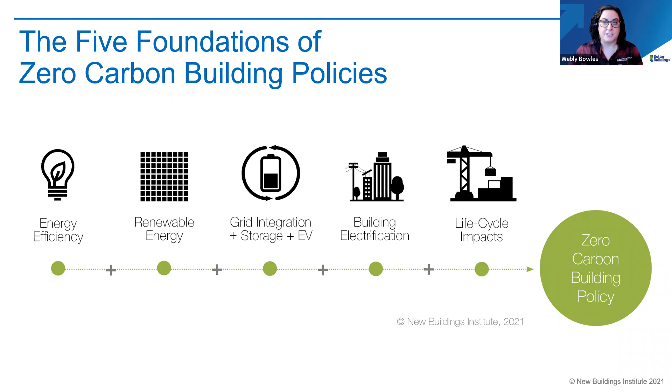The term carbon neutral has picked up steam over the last year or so, and it has a couple different meanings. For years, we've seen utility programs that have only been focused on energy efficiency, and that has led the market to lower energy buildings, which is great. But now the building sector is shifting from decades of regulation and programmatic orientation around energy efficiency, from kWh and therms, to governmental actions that are centered on carbon and GHG emission reductions. So we need to figure out how we align these two, but how do we do it?

Just as zero energy has had many different definitions, so does carbon neutral. NBI reviewed over 15 different definitions to evaluate the similarities and differences and how they were represented, including embodied carbon, on-site combustion, and how renewables were defined and how they were actually counted. And while the details varied, we noticed that there were actually a lot of commonalities. The divergence was really in the details. This chart is from WSP. NBI amended it a little bit, and it represents a few of the carbon neutral definitions and programs that are out there, and it shows the commonalities and variances. Next slide.

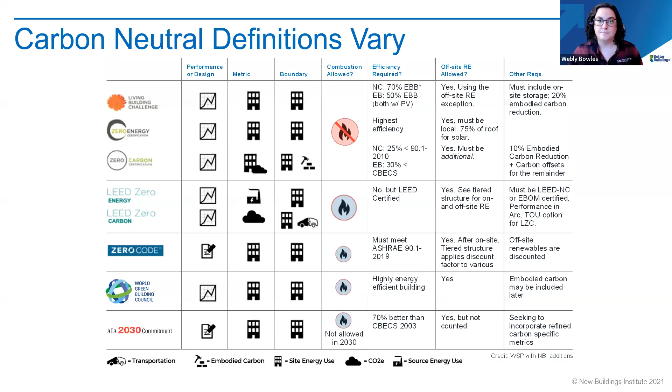And then we throw in corporate terms, and there's a whole different structure about addressing carbon emissions. This is the World Resources Institute's GHG Protocol, Greenhouse Gas Emissions Protocol. I'm going to present this at a high level. There's a lot more that goes into this; we could do a whole 1-hour discussion around it. But essentially, Scope 1 emissions are the emissions from your owned, leased, and otherwise controlled gas equipment: gas appliances, fleet vehicles, fossil fuel leaf blowers, and other such things. There are a few other emissions counted in here, including fugitive emissions from on-site gas and refrigerants, but essentially it's related to gas.

Scope 2 emissions are from the electricity indicated on your electric bill. Electricity emissions vary depending on the energy source. In the Midwest, you might have more coal and gas, so your electricity is going to have a higher amount of carbon in it compared to those that live in the Northwest using the same exact amount of kWh, where our electricity is produced with more hydropower.

And then Scope 3 emissions are called indirect emissions, and those are the emissions from day-to-day activities like travel, purchased materials, waste, and other outsourced activities. Scope 3 is often calculated based on a dollar amount spent, but I do want to note that as embodied carbon is becoming a larger topic in buildings, this is where Scope 3 emissions land. So if you're familiar with the term embodied carbon in buildings, this is where that is. Again, this is at a very high level. The Better Climate Challenge is focused on Scope 1 and Scope 2, so we can set aside Scope 3 for now. Next slide.

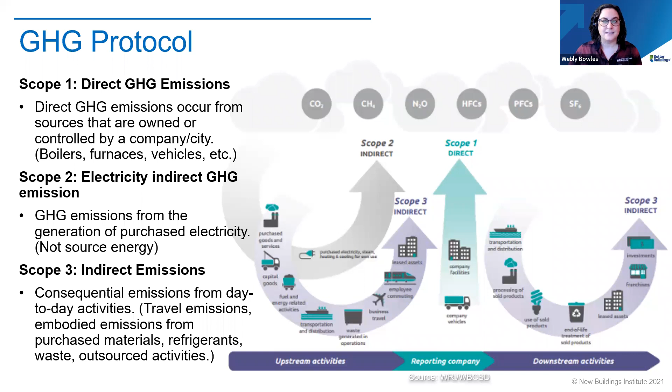Zero energy building policies are not the same as carbon neutral policies. We've seen zero energy policies spread across the US, which is great. But going back to the 5 foundations, we're looking at 4 that are really around carbon neutral policies. Within renewables at the building level, California Title 24 requires solar ready, and Santa Monica in California requires 1.5 watts of solar power installed per square foot of building. For multifamily and small commercial, that is 2 watts per square foot. So there are requirements around renewables in some places in the US.

Around grid integration, Washington State actually requires that any water heaters sold in the state have a demand response communication module installed on that water heater. It doesn't require them to be controlled by a utility, but just to have the option for future demand response.

With building electrification, we're seeing a lot more gas bans across the country. Berkeley was the first in the nation to do that: no new fossil fuel in new construction. And Brookline, Massachusetts has a similar one, which is no fossil fuel in residential.

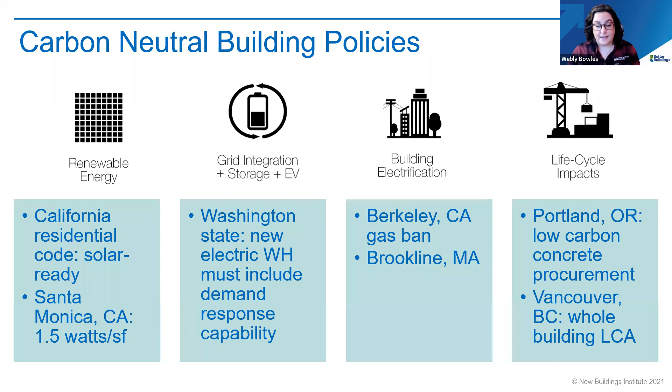And then within embodied carbon, this is where we are seeing a lot of spread as well. So in Portland, Oregon, we have a low carbon concrete procurement policy, as well as a deconstruction policy. Vancouver, BC has a whole building LCA for those that are rezoning. And then there's a lot more happening around refrigerants. So collectively, these policies are requiring low embodied carbon and low operational emissions. Next slide.

So when trying to describe carbon neutral buildings, we split the actions into two groups. We look at the core components and then the additional components. The core components of carbon neutral buildings are very similar to zero energy buildings, if you're familiar with that. So we have energy efficiency, renewables for on and off site, off-site renewables being a little bit of a newer concept, and then measuring and managing net zero operations, which is essential.

And then in addition to the core components, we have additional components. These are the components that will lead us towards a carbon neutral future. So electrification means no gas on-site combustion. Building grid integration strategies, allowing the grid to adjust set points of the building's mechanical systems and using the grid during off-peak hours when the grid energy carbon is actually lower.

Low global warming potential refrigerants. These are your natural refrigerants and lower global warming potential blends. And then also looking at leak protection. That's a really important thing when it comes to refrigerants because they are very potent and can destroy the environment. And then the last one here is embodied carbon. So selecting lower carbon materials that reduce carbon emissions before the building is even operated. Metals and concretes have the largest potential for those.

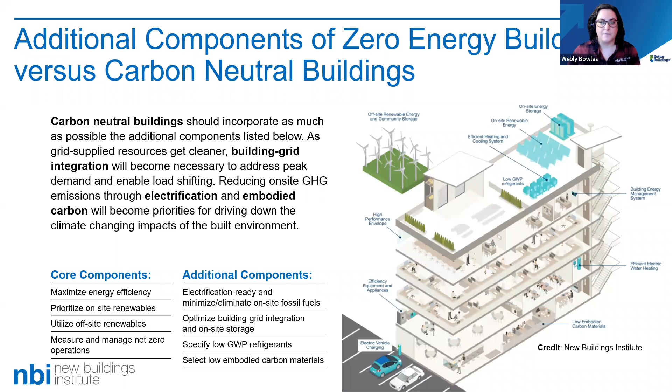So beyond decarbonizing buildings for the good of using less energy and cutting emissions, high performance carbon neutral buildings have additional benefits. We can future-proof against rising energy rates, which can help reduce our bills. High performance buildings provide an opportunity for designers to market their understanding of these components and help them limit their learning curve when new codes and policies come out. There's also health benefits.

Fossil fuel free buildings have cleaner air due to no gas, so we're not looking at some toxic indoor pollutants. Often high performance buildings have tighter envelopes with better insulation, so we can better control the ventilation within the building. And we can make sure that there's no cracks in the envelope, so we're not pulling in air through the envelope, which can often lead to water infiltration, mold, and other contaminants. Again, getting back to that healthy buildings idea.

That thick sealed thermal envelope is also great for resiliency. It limits the indoor temperature swing if the electricity goes out. There's a great report called Baby It's Cold Inside, and it looks at the conditions inside, based on different thermal envelopes, when the power goes out.

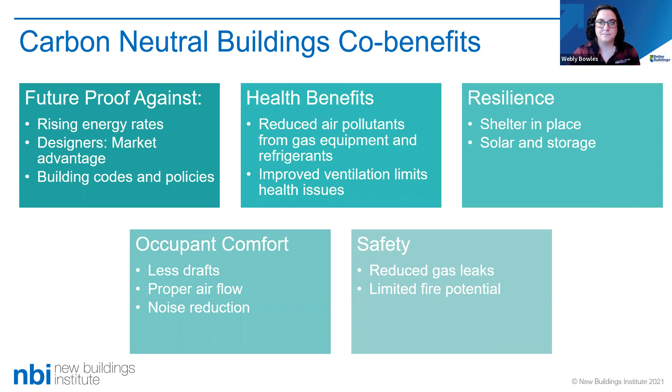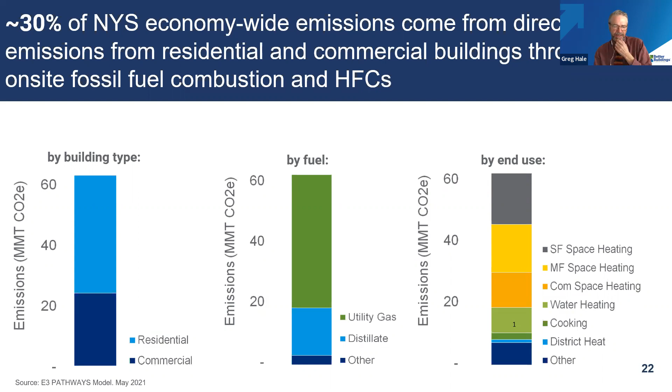So the scale is really critical here. We've got 6.2 million buildings in New York State, over 5 million single family houses. We've got to be operating at 10 times the level of heat pump installations and electrification projects that are happening today. We've got to be doing 200 to 250,000 houses a year by 2030. And right now we're doing about 20 to 25,000. So massive scale, great economic development opportunity, but obviously a big challenge.

And we came out within the scoping plan under the Climate Act that aggressive regulatory signals are going to be needed. So in particular, for new construction, we have to require all electric high performance new construction, and the recommendation in the scoping plan. And by the way, the scoping plan will be out for public comment next year and will be finalized at the end of 2022. So what I'm talking about here, these are all elements that are in the draft plan, and we think they're required to stay in there and become in the final plan.

So the first one is all electric new construction. They're actually saying by 2024 for low rise and single family houses, and by the 2027 code cycle for larger commercial and multifamily buildings. And pretty exciting, yesterday, the New York City Council passed a law requiring all electric new construction with phase-in dates that are pretty much aligned with what I just said.

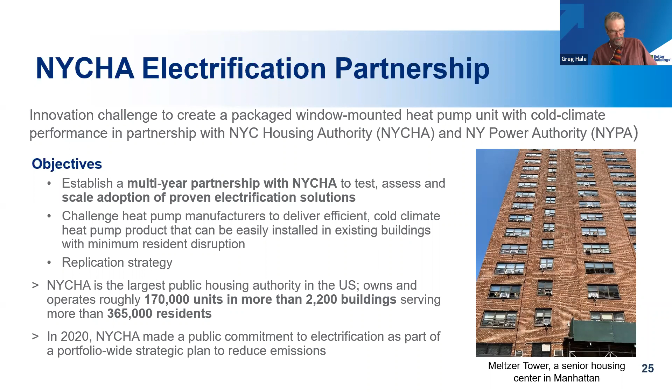Next slide. For this particular pilot, we have 4,000 units, 11,000 heat pumps that can be rolled out once the spec is met. But then NYCHA has committed to roll that out beyond in other parts of its portfolio if the proof of concept works, and we're pretty confident that it will.

But it's not just NYCHA buildings. Like I said, this could reduce the cost of electrification across these types of multifamily buildings throughout the U.S. Northeast. There'll be cold climate heat pumps. They'll work for this environment.

So then we have the New York Power Authority that can undertake bulk procurement for NYCHA. They are the provider of electricity to NYCHA. So we've got that element in play, and we're also collaborating with DOE and HUD. You know, this is really exciting that HUD's getting in the game here with their climate action plan and the Better Climate Challenge. It's truly exciting. So they're going to be working with us to try to basically spread this as far and wide as we can.

The other thing about NYCHA is they're also participating in a different type of renovation project with our RetrofitNY team. Next slide. So this is a different approach. It's based on a European initiative called Energiesprong, and the idea is that we have a market catalyst. We're market makers. So we're working with manufacturers, with the architect, engineer, construction industry, also our affordable housing agencies. We're aggregating demand with building owners, figuring out a financing product, and figuring out what regulations might need to change to make all of this work.

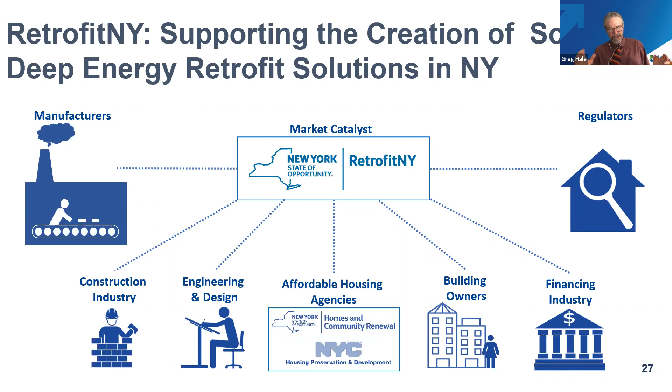And this, next slide, is doing a truly deep energy retrofit, starting with low and mid-rise buildings up to 7 stories, but essentially you're doing it from the outside. So you're doing it with minimal resident disruption. You don't have to empty the building for a year and go at it from the inside. You're essentially wrapping the existing building, call it with a high performance sweater. And the panels on the walls incorporate the windows. So it's all prefabricated off-site.

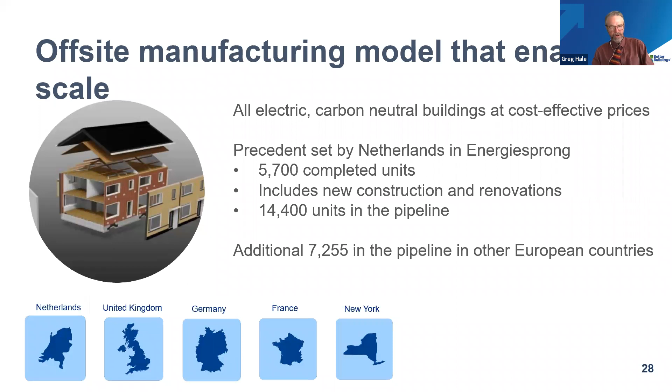Let's go to the next slide. This is just saying that it's spreading across Europe. They've completed 20,000 units completed or in the pipeline in Europe already. So it's achieving scale. But the idea here is that you're taking a lot of the work off-site. So you're reducing the cost of the on-site labor, and you're actually addressing the labor shortfall in construction and translating some of those jobs into higher tech jobs, which are more attractive to people entering the workforce today.

So you make these panels off-site. You've already done an exact measurement of the building through 3D measurement technology. So you know exactly what the building looks like, and you build these panels so they just fit in place on top of the old building. You take out the old windows and you put this new panel in place. You wind up with deeper window sills that people like.

And then if you look at the left on this, that's what we call an integrated mechanical system or energy pod. And that's all of your mechanical systems in one unit that's easy to put onto the building, sort of plug and play. You can get at it to maintain it from the outside. That's going to have your heat pumps, your ventilation, your ERV, your solar inverter, your hot water heater. So all in a single unit, and there are different shapes and sizes of those. Next slide.

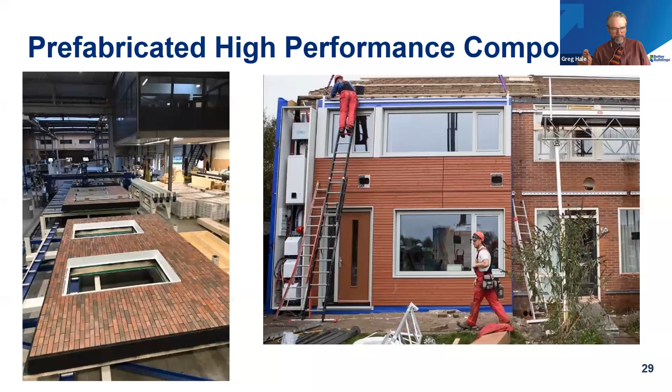So we've got cost compression here. This is one of the reasons we're really pushing this approach, is that in the Netherlands, they're able to achieve over a 50% cost compression in about 5 years by developing scale and the way this system works. So we do believe this is a way of getting at the spiraling costs that are happening today.

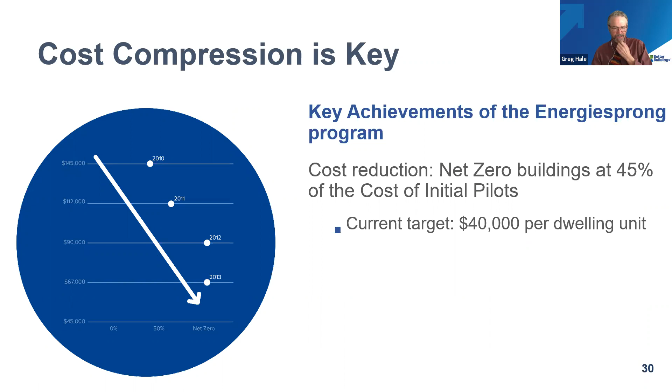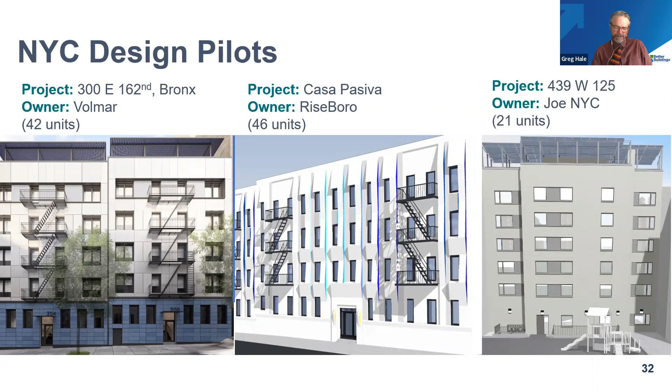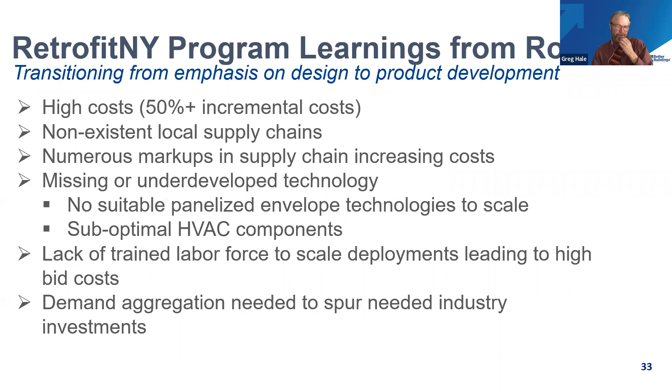So I just got another minute or two here. So what we learned is that there are high costs, issues with the supply chain. You know, the technology wasn't there, the labor force wasn't there. And if you go to the next slide, what we have done is spent 2 years developing all of these elements of the market in the background.

And we now have a rolling request for qualifications where we've qualified the components that will work, buildings that will work, and owners who are interested, and what we call solution providers, which is a new business model that will be able to provide a turnkey RetrofitNY style project onto a building that specifies it, instead of going through all of the intermediary steps of standard bid and construct projects.

So we have just released a new program opportunity notice, a new PON, to provide the gap funding required to do the next generation of projects with people who have come through and qualified and understand what we're driving at. So we're very excited, hope to have some projects underway next year.

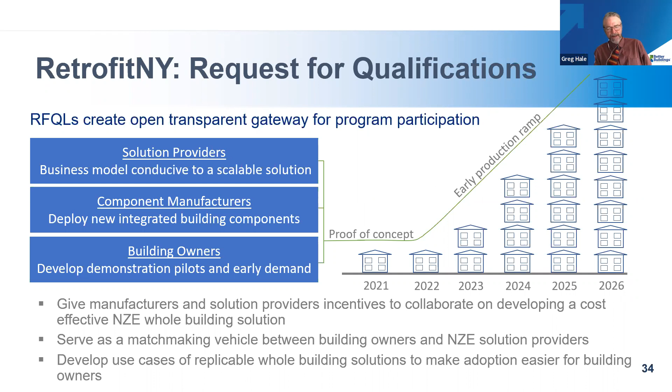Next slide. I'm not going to go into this, but people can ask questions and get back to me later. Very interesting data on new construction of high performance buildings, essentially showing that as you do a couple of these, the costs have really come down very close to parity in new construction for high performance. There's just no reason to build the old way.

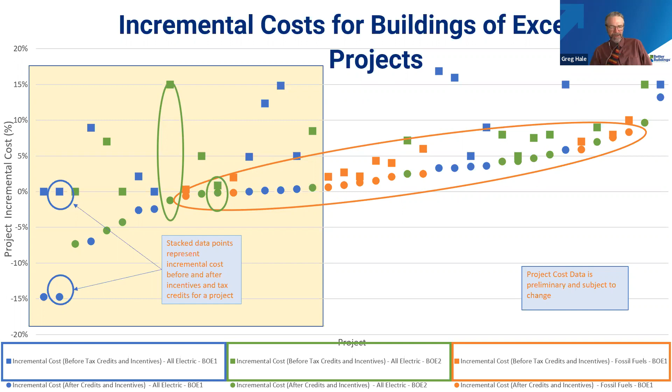And I've got to stop now. If you just go through the slides to the end, you'll see a few projects that are underway. You know, these are not dull buildings. Those were all high performance, going for passive house certification, being constructed today in New York State. So very encouraging. We're at the beginning of this ramp, and it's going to be exciting to go forward.

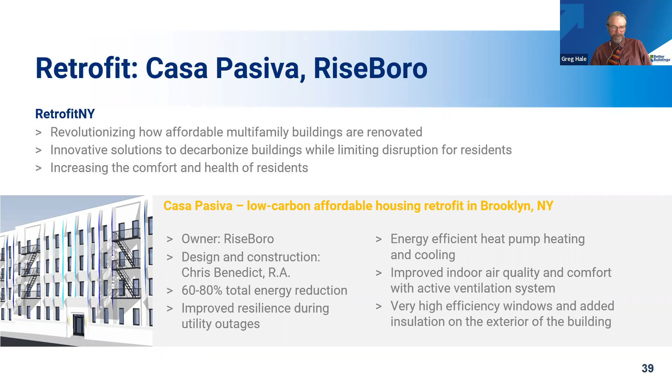Thanks so much, Greg. I'd like to follow up on Greg's overview of the New York City Housing Authority's Clean Heat for All Innovation Challenge with NYPA and NYSERDA. This is an opportunity to help kickstart the market for packaged cold climate heat pumps and reduce the cost of electrification while maintaining efficiency of existing cold climate heat pumps. NYCHA is a Better Buildings Challenge partner and is looking for other affordable housing organizations to express interest in this solution to help convey market demand.

Following today's webinar, we will be sending out an additional resources handout that will include a letter of interest form that interested organizations can sign. If you're interested in expressing your support for packaged cold climate heat pumps, please consider sending a letter of interest form back to NYCHA. This action in no way commits your organization to purchase or engage in the project in any way, but it sends a signal to potential manufacturers of this technology that if they are able to come up with a solution, there will be people who will want to buy it.

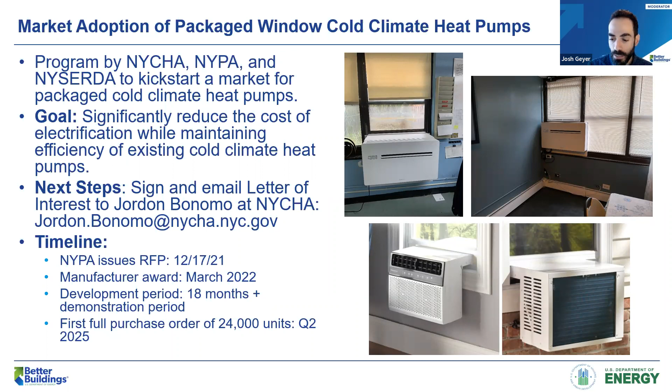Next slide. Last but not least, we have Magda and Mark from Tenderloin Neighborhood Development Corporation. Magda is TNDC's Sustainability Program Manager. She joined TNDC in April of 2019 following her work with GIS analysis at Apex and energy efficiency at San Francisco Department of the Environment. She currently manages TNDC's sustainability efforts to achieve goals set for energy, water, carbon reduction, and waste diversion.

Mark is TNDC's Director of Facilities. He is a certified systems maintenance administrator and has over 33 years of experience in sustainability, facilities operations, management, and maintenance. He is passionate about curbing the housing crisis plaguing our communities, as well as the climate crisis impacting our planet. Welcome, Magda and Mark.

Good morning. Greetings from TNDC. Welcome to our roadmap to carbon reduction. Next slide, please.

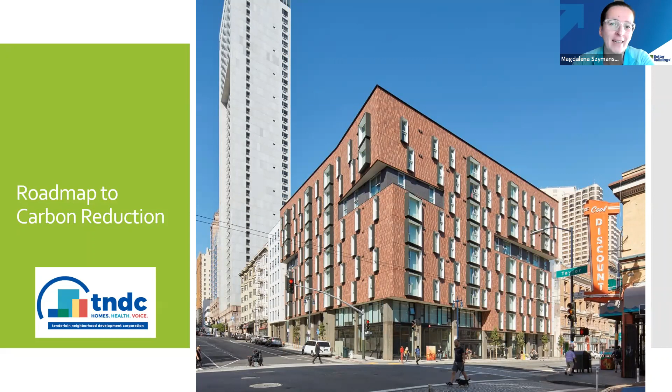Tenderloin Neighborhood Development Corporation carries Tenderloin in the name, but we are present in 8 San Francisco neighborhoods. We have 43 buildings in full operation right now. 2 brand new properties are just about to welcome first tenants, and an additional 11 are coming up. TNDC is serving a population with low and extremely low income, and our goal is to provide not only home, but also health and voice. Next slide, please.

It all started in 2013 when TNDC joined the Better Buildings Challenge for energy and water goals. The sustainability projects were planned to focus on three main phases. While auditing properties, we collect data, checking usage, looking at available incentives, and also property budget, because finances and the final cost always weigh heavily on the decision about projects.

As the next step, we did and still do run the project itself. This includes energy and water efficiency upgrades, investing in renewables like installing solar systems, but also switching electricity to super green, meaning carbon emission free. For new development, we have design guidelines to make better choices at the source of building brand new houses.

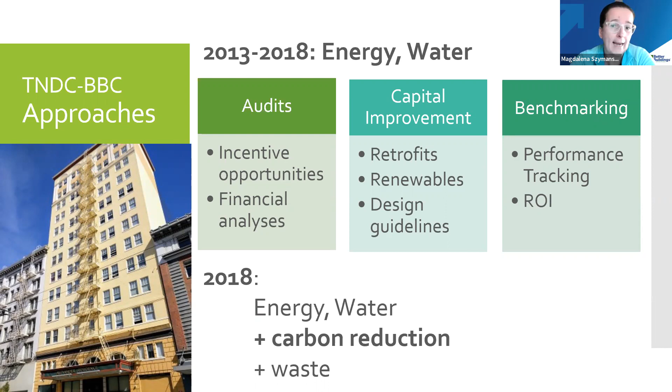After completion of the projects, we are looking at the data again, monitoring the savings, comparing predicted savings to calculated actual savings, and also looking at the return on investment. Following this path, with 2018 data, we reached our 10-year goal within the first 5 years, and we started to look at what is next. Carbon tracking came as a natural next step.

We already have continuous data for kWh and therms usage. So we see that tracking the progress in energy use reduction, we should also be able to track the carbon reduction. With this, we decided to add a carbon reduction goal along with the waste goal to our Better Buildings Challenge, and 2018 became the baseline for our new goals.

What we see here is our first carbon emission inventory, completed in summer of 2018 with the help of a Climate Corps Fellow. We used the 2018 energy data and calculation sheet provided by the Environmental Protection Agency and Greenhouse Gas Protocol; the links we can see here. And we set our goal to 50% reduction in 20 years. We run the calculation regularly, and at this moment we have results for the past 3 years.

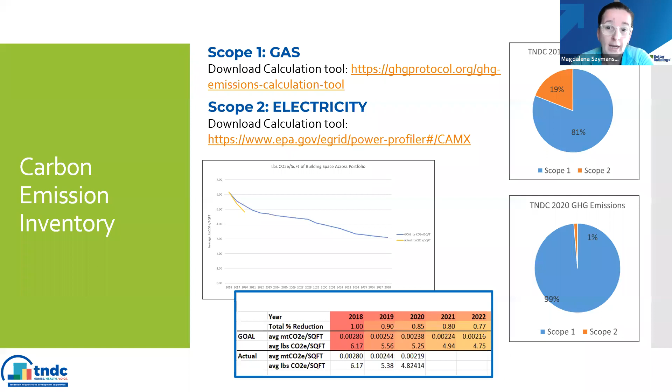What is clearly visible here is that almost all of TNDC's current emissions came from gas. With green and super green electricity, we were able to significantly reduce emissions from scope 2, and this is why our focus is on electrification. Next slide, please.

So how do carbon reduction oriented projects look in reality? Let us present you with our case study, SOMA. This is a property of 2 buildings, studio or 1 bedroom, over 162 units, 5 floors, and it was the first property where we installed a heat pump, replacing the traditional gas boiler heater for domestic hot water.

The total cost of the entire package was over $1 million. We were able to receive over $900,000 in incentives, which brought down the net cost to us to around 15% of the total cost. Next slide, please.

Heat pump installation is always supported by other sub-projects to make sure that the building reaches its maximum efficiency before sizing the heat pump, but also to maximize incentives. It is usually 6 to 12 or even 13 sub-projects. The expected savings were calculated based on the modeling used by incentive programs, and they were very promising. We were eager to find out what the actual savings would look like. Next slide, please.

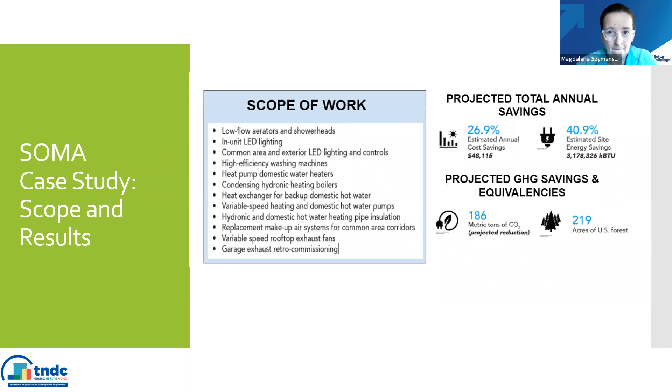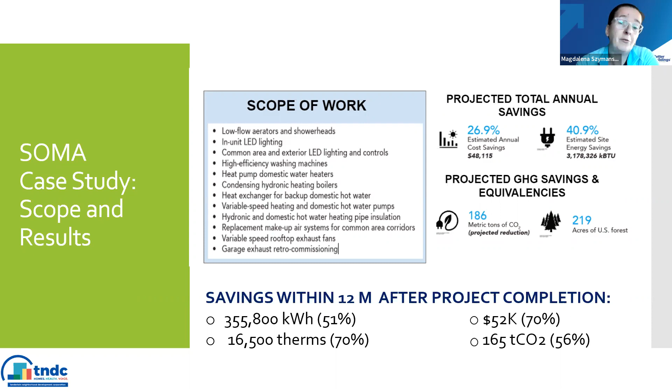So within the first 12 months after we completed the project, we see great results. Overall, this is over 50% reduction in electricity, 70% reduction in therm usage, which gave us over $52,000 savings, and we reduced carbon emissions by 165 tons. Next slide, please.

We did not stop with SOMA, and we are targeting the carbon reduction approach as aggressively as we can. We completed the energy upgrade package at 2 properties. We have 3 properties right now under different phases of construction and 3 more at different stages of planning.

As a nonprofit, we wouldn't be able to move with this speed without external financial support. Incentive programs are key parties in making this all happen, and I cannot stress enough the importance of incentives' role in running carbon reduction-oriented projects. Next slide, please.

So what have we learned from these several completed and under construction projects? Staff capacity and turnover is visible, especially during the last years, across the portfolio here at TNDC, but also at incentive programs and our vendors. This could present a challenge when we need to bring a new person up to speed. Where are we now with the project? What is needed next?

And just to mention, from the idea of the carbon reduction package to the moment we are ready to start construction, it usually takes us between 8 to 12 months. So this is a lengthy project. And as each package includes multiple sub-projects, we are dealing with multiple vendors. From my perspective, it is a great idea to have a solid scope of work, with all the sub-projects listed, to avoid any surprises as we go along the project.

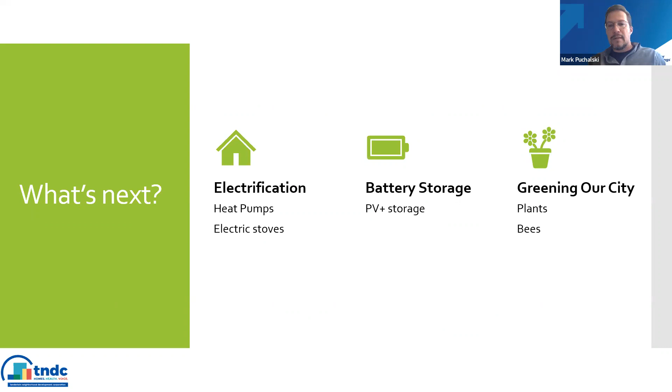So the earth is what we all have in common. So that unity is what we're talking about. We all live on planet Earth. Everything that happens to the earth happens to all of us. We are indeed from the earth. So it's important that we get over ourselves with the money aspect and the obstacles we place in front of our own initiatives, and we do the right thing. We take the leadership approach and we realize that this is our #1 priority in the world right now, is our environment.

And I want to thank everybody for joining today. I hope you go out there. I hope you're strong. I hope you're dedicated, and by all means, be tenacious. Tenacity wins the day. And it's tenacity that's going to save the planet.